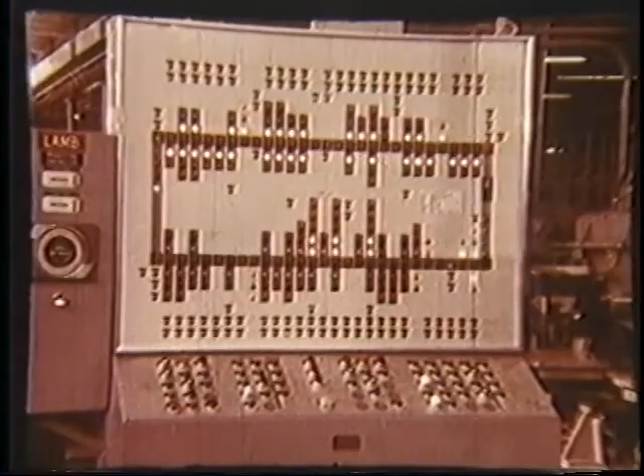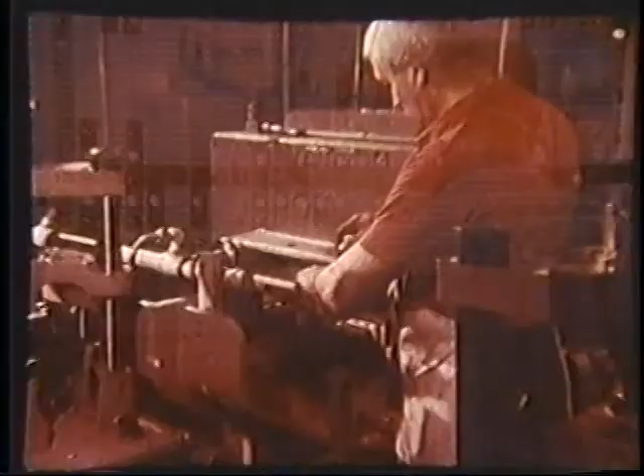A man, a machine, a method, and sometimes a malfunction. Does this ring a bell? Let's face it, this breakdown could have been avoided, and valuable production continued uninterrupted. The fault did not lie with the machine or the twist drill. This drill was damaged because it was improperly repointed.

The twist drill will stand more strain in proportion to its size and weight than any other cutting tool. What makes this tool so durable? It was designed that way.

Get a haircut, hippie! Yeah, this isn't the 60s, dill hole.

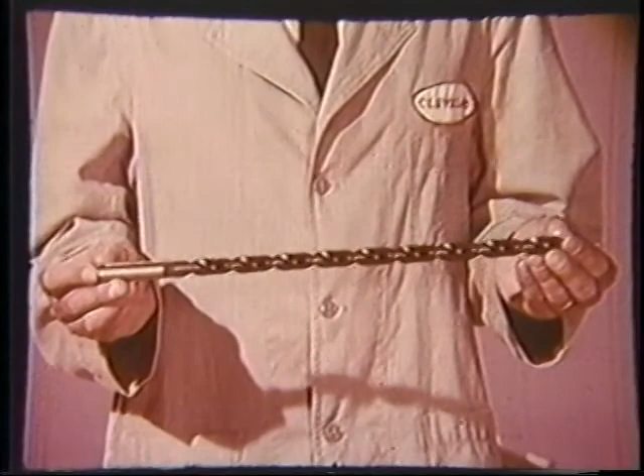Steel to packaging is very carefully controlled to ensure uniform quality and dependability. We'll see this fascinating manufacturing process in a few minutes. But first, let's look at this twist drill as if it were an assembly of parts. Imagine this as a section of metal rod. Although drills are manufactured in many lengths and sizes, they all possess the same basic features.

We can't tell you because, like, then we'd have to kill you.

In the rotating device, shanks come in many shapes and types, but the three most common are the straight shank, the straight shank tanged, which is used with a split sleeve, and a taper shank.

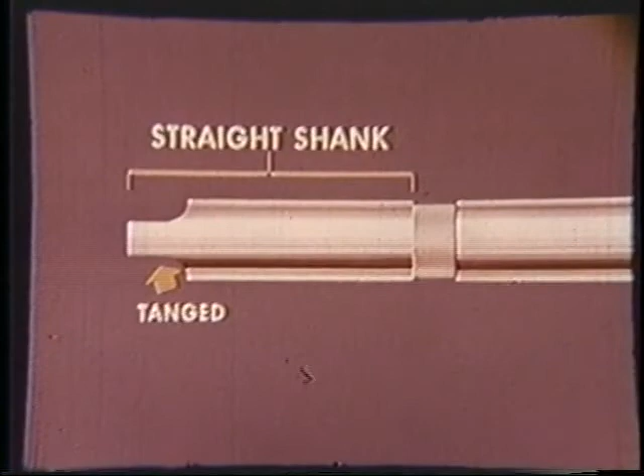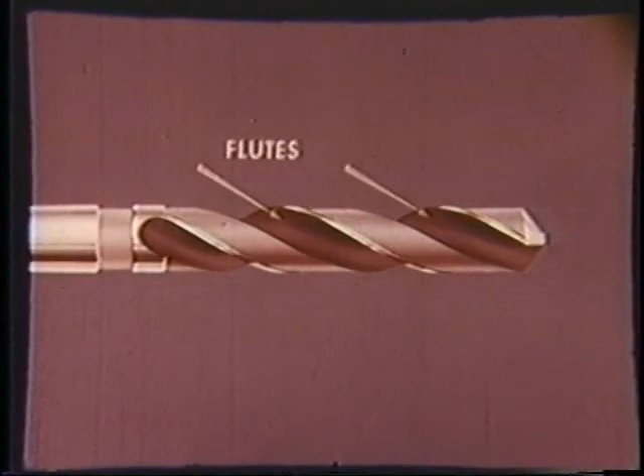The marking recess directly ahead of the shank is the neck of the drill. This is the body of the drill. Formed on the body section are spiral grooves or flutes. The angle of these spiral grooves to the axis of the tool is called the helix angle. The junction of the flutes with the point forms the cutting lips.

The flutes provide a passage for the removal of chips, and at the same time allow coolant to reach the cutting lips.

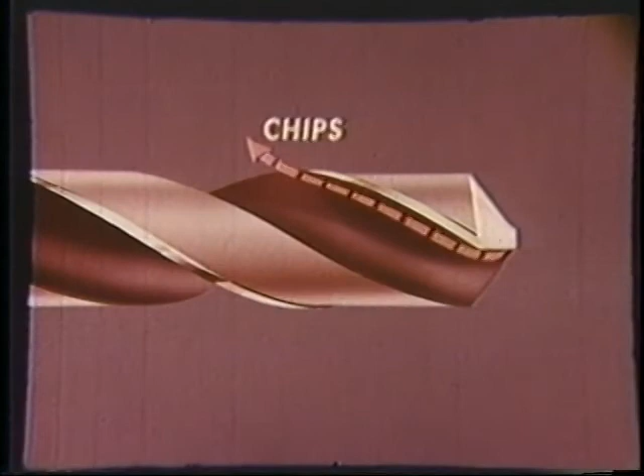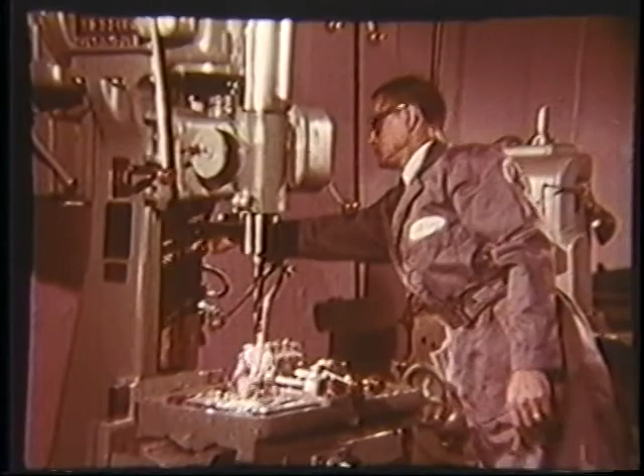That would be a cool doll if you had, like, this little bald dude without a shirt, and you, like, pull a string on the back of his head and he just starts shouting at you.

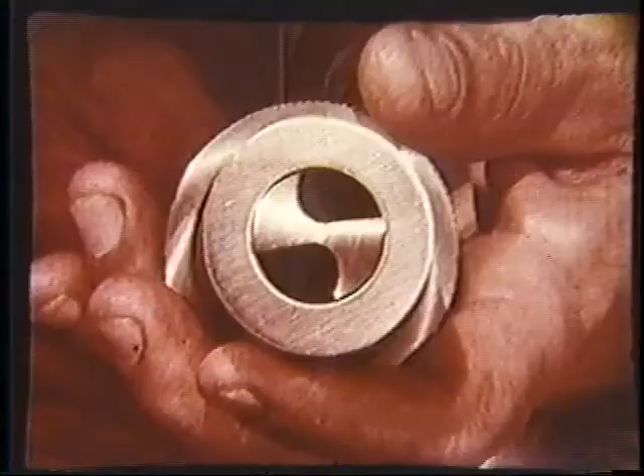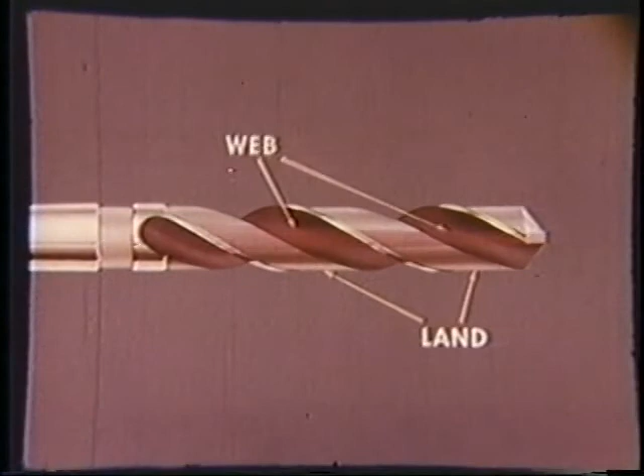The edge of the land is the margin, and behind the margin is the body clearance. The margin supports the drill in the hole by providing a bearing surface. This helps maintain a straight hole. And the body clearance prevents excessive rubbing and heat generation on the walls of the hole and allows an additional passage for coolant. Drills are also ground with a small amount of back taper to keep them from wedging in the hole. The central portion of the body that joins the land is called the web. This is often referred to as the backbone of the drill. The web may be of either a tapered or parallel construction.

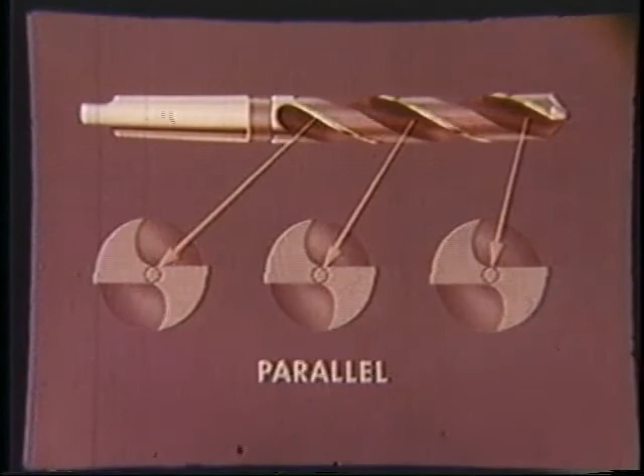The design of the body of the drill will vary according to the type of work performed. And finally, the business end of the twist drill, the cone-shaped surface that does the cutting. We want to go into this point in more detail. It's important. But before we go any further, let's see what goes into making a taper shank twist drill like this one.

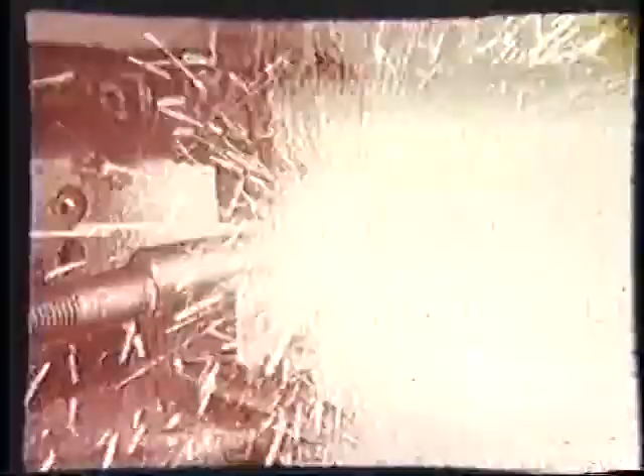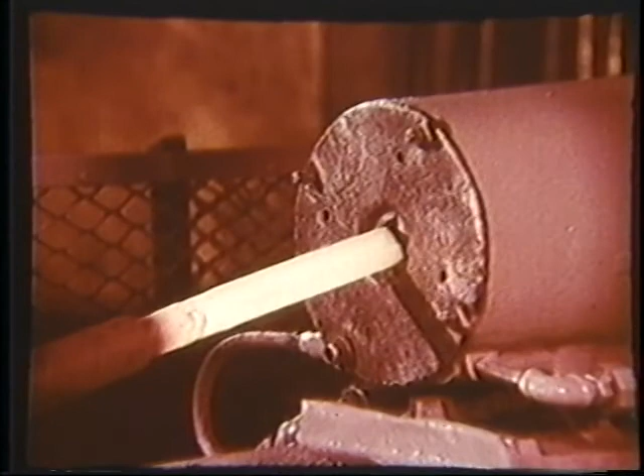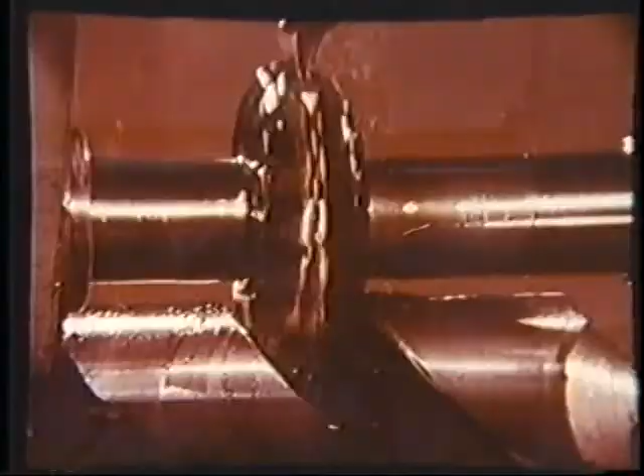High-speed steel for the body section and shank steel for the shank are welded together. And then the high-speed steel end is forged with U-shaped grooves. Then twisted to form rough spiral flutes. Turned, and so is the shank. The flutes are milled to form the lands. And the body clearance is milled to leave the margin. Then the drill is hardened.

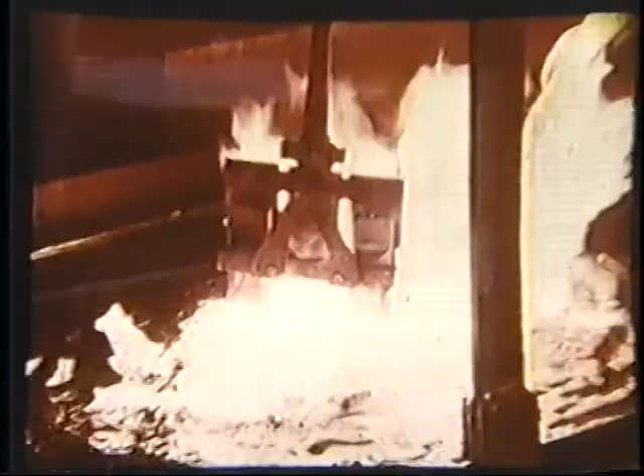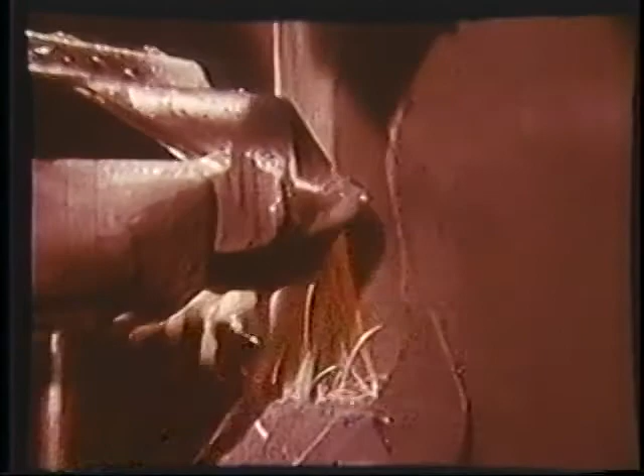And cleaned. Ground. Surface treated. And finally, the point. And the point is the key to successful drilling. Here is the point.

We have a sharp cutting edge, which will shear the material easily out here.

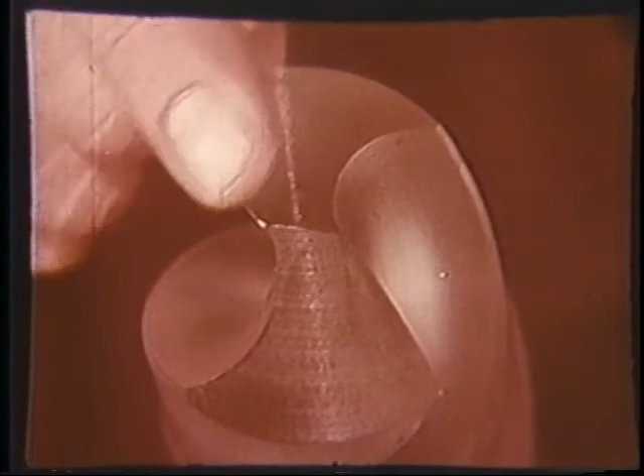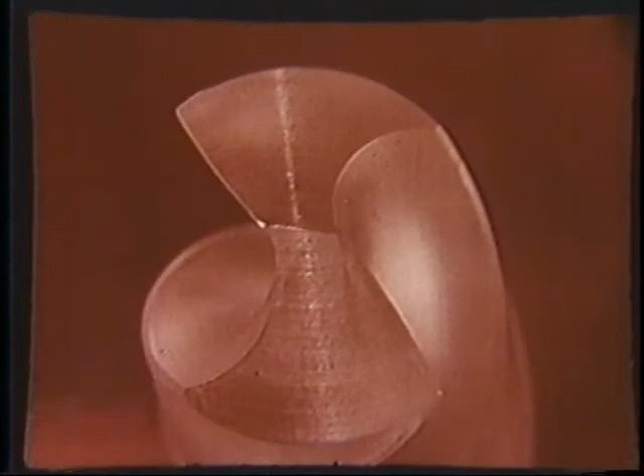This can form a chip. This part of the point is called the chisel edge. It's the edge at the end of the web that connects the cutting lips. The cutting lips are the cutting edges extending from the chisel edge to the outside diameter or periphery of the drill. Now, from another angle, the point looks like this.

When we look at the side of the drill near the point, the chisel edge is here, the cutting lips here, and this portion of the point is called the lip relief. This is the surface of the drill point which slopes away from the cutting lip.

This angle varies with the size of the drill. It should be about 20 degrees for a 1/16 inch diameter drill, and decrease as the drill size increases to about 8 degrees for a 2-inch diameter drill.

The sole purpose of this lip relief is to prevent the surface back of the cutting lip from rubbing on the work and impeding penetration. This lip relief is important to the life of the drill, but this can be shown better in an actual operation.

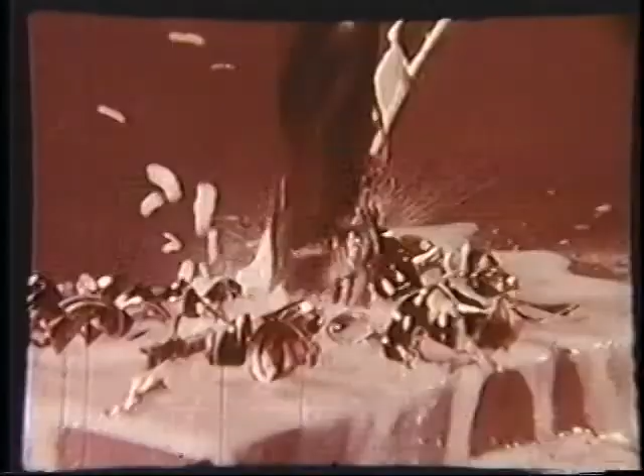This drill has too much lip relief. The life of that point has been shortened considerably. Any point will be ruined if there is too much lip relief and the slope angle is too steep.

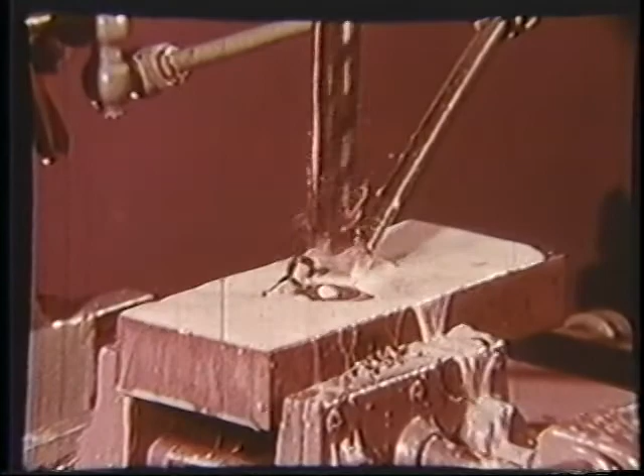When the lip relief is ground on both cutting lip areas of the drill, an angle is formed between the chisel edge and the cutting lip. This is called the chisel edge angle.

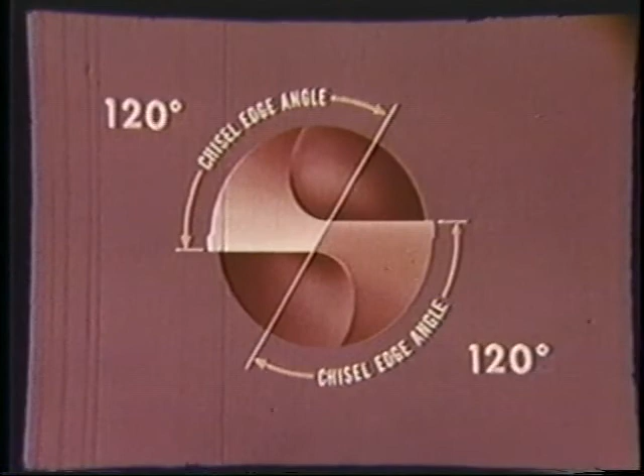This angle usually approximates 120 degrees for drills pointed with lower lip relief angles, and up to 135 degrees for those drills pointed with higher relief angles.

A 118-degree angle point, or a 59-degree angle on the side.

A correct point must have both cutting lips ground at the same angle. Not like this, or you'll produce an oversized hole.

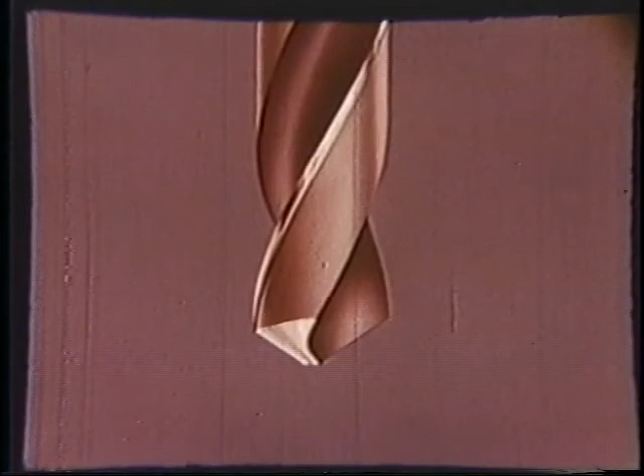A while ago, we mentioned a balanced point. This means the angles on each cutting lip must not only be the same, but each cutting lip must be of equal length, or again, an oversized hole. Remember, either one of these factors, or a combination, will produce an oversized hole.

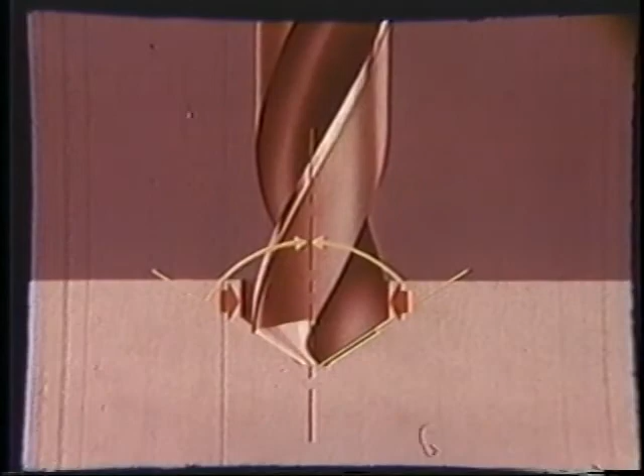Now, this brings us to other considerations. Does the material influence the choice of drill?

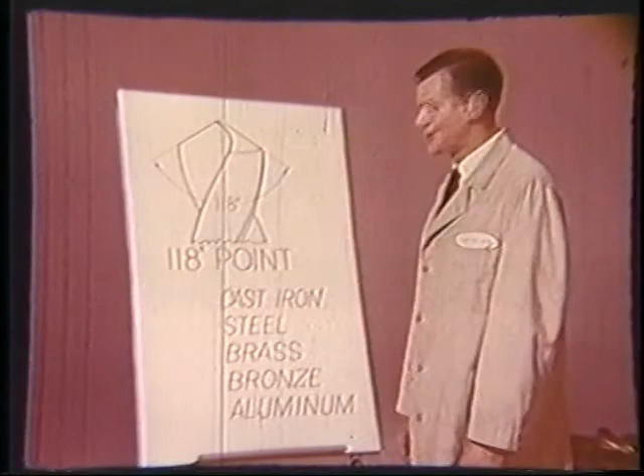This 118-degree point is fine for general-purpose materials such as cast iron, steel, brass, bronze, and aluminum. But with the low tensile strength materials, such as bakelite, wood, rubber, and plastic...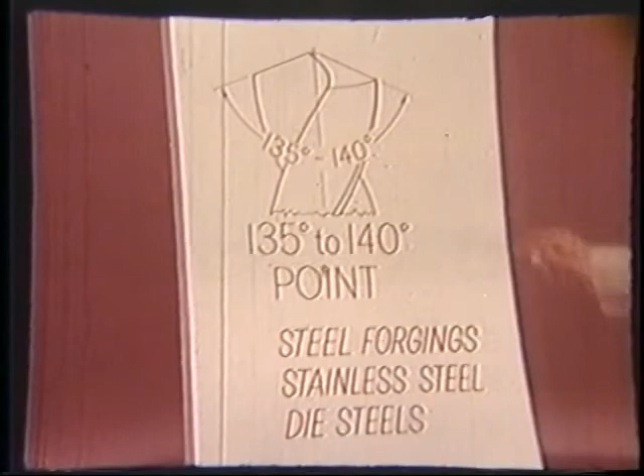A 90-degree long point is best for drilling. While with the harder materials, such as steel forgings, stainless steel, and die steel, they should really be drilled with a 135 to 140-degree point.

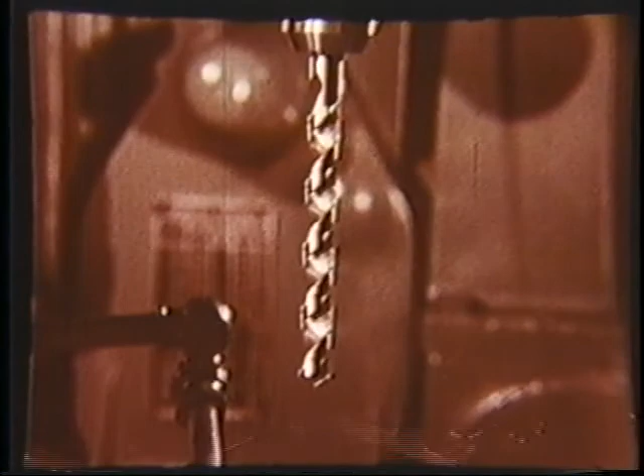This is a high helix drill. The high helix drill is used with materials such as aluminum and die cast. Because of the consistency of the material, in this case aluminum, the chips must escape faster than with other materials.

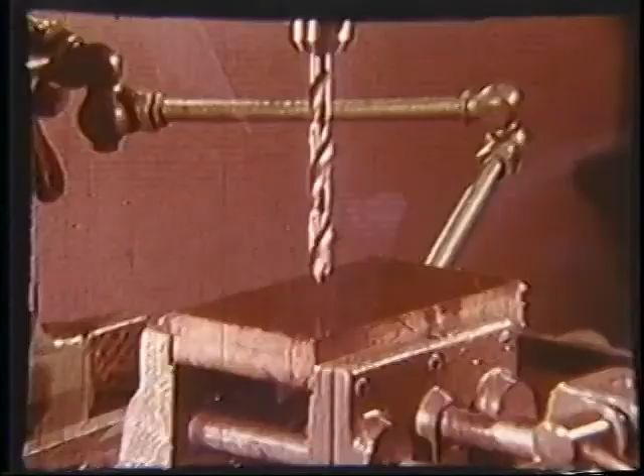It's best used with low tensile materials, bakelite, wood, and rubber.

The harder materials, die steels, forgings, and some stainless, really should be drilled with a heavy-duty drill and a 135 to 140 degree point.

These are just a few of the special duty drills. There are many more. But when you use a general purpose drill, know these angles.

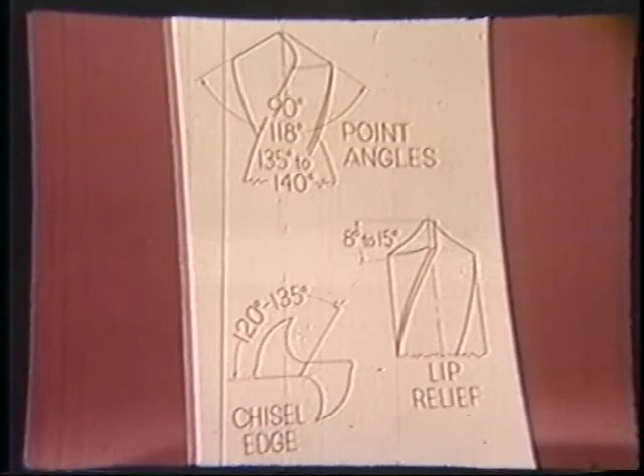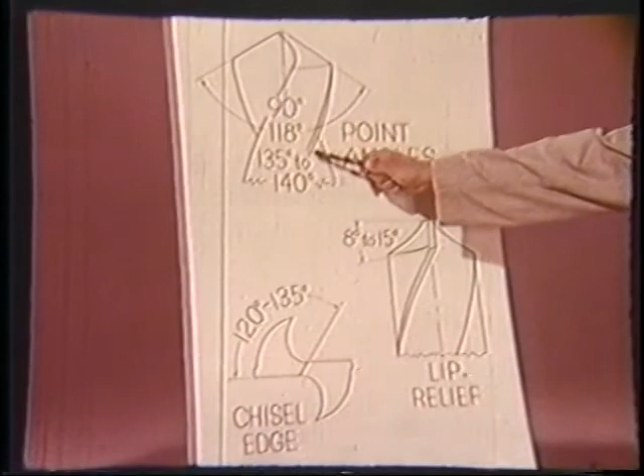8 to 15 degrees lip relief. 120 to 135 degree chisel edge angle. 90 degree, 118 degree, and 135 to 140 degree point angles.

Now let's watch some of that heavy-duty drilling which takes place at the chisel edge of the drill. One of the best ways to illustrate what the chisel edge does is to let the chisel edge only do all the drilling.

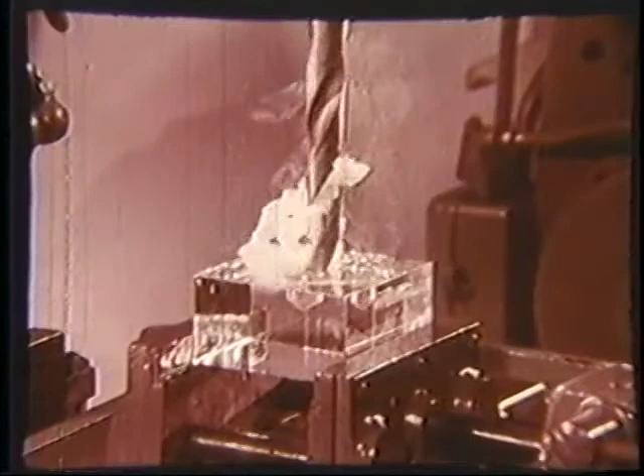See what happens? The chisel scrapes its way through the material. To make an efficient cutting tool, we very precisely combine the chisel edge with the cutting lips and produce a tool strong enough to push the material away from dead center of the hole out to the cutting lip area, where the chips can then be made.

The twist drill is a hard-working cutting tool, and it will continue to perform quite well unless we disturb the delicate balance of the shearing and thrusting forces that occur at this point.

That brings us to other basic facts which must be considered every time a drill is used. Among the most important are the speed at which a drill is run and how it's feeding.

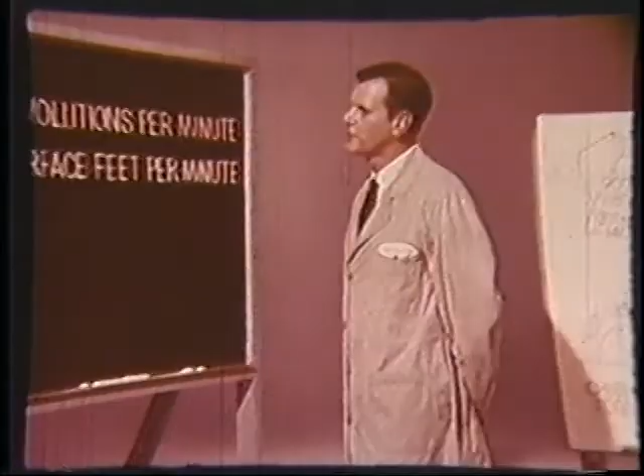This is expressed in two ways. First, by RPM, revolutions per minute, or simply how many times an object rotates in a minute.

Or surface feet per minute: how fast the outside diameter of the tool moves in relation to the work.

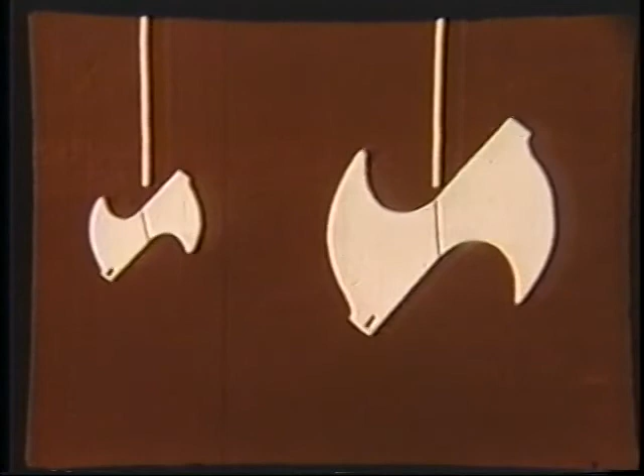Here's a demonstration that will help you understand surface feet per minute. Here are end views of two twist drills of different diameters, one about twice as large as the other. They are traveling at the same RPM. However, since this drill is twice as big, it travels twice as far as the smaller drill in one revolution. This distance traveled is called surface feet.

Now, to make this small drill travel the same surface distance as the large drill, we must increase its revolutions per minute.

Both drills are now traveling at the same surface feet per minute, SFM. SFM is usually used to express the speed at which a given material is machined, because surface feet is common to all diameters, while, as we've demonstrated, the RPM necessary to obtain the given surface speed will vary with the diameter. Each material has a surface feet per minute at which it can best be drilled.

Speed is important, and so is feed. Feed is how deeply the...

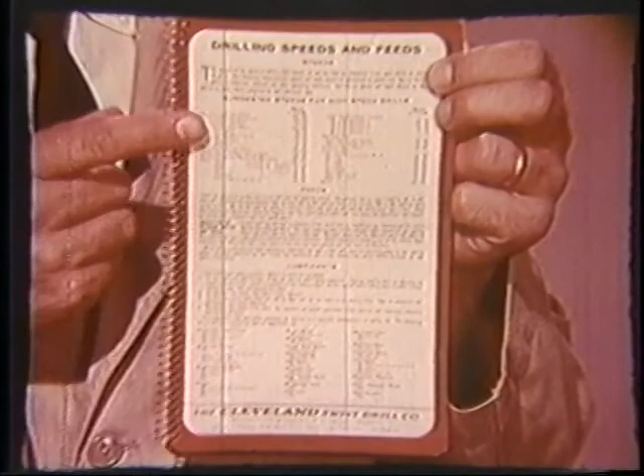Speed and feed charts are available and offer the correct range for drilling. Refer to them. And something else to keep in mind: many drills are ruined every day by excessive speed, which actually burns off the cutting lip corners.

Wherever possible, use a coolant for drilling. A coolant will cool the drill, of course, but more important, well, watch. A coolant should have sufficient lubricity, or slipperiness, to allow the hot chip to slide easily away from the cutting edge and then carry the heat away with it.

While we're here, let's discuss good shop practices. To begin with, to get a good drilling performance, the operator must give a good performance.

Cleanliness is the word. Check that the shank and holder are clean. Dirt will cause the drill to run out.

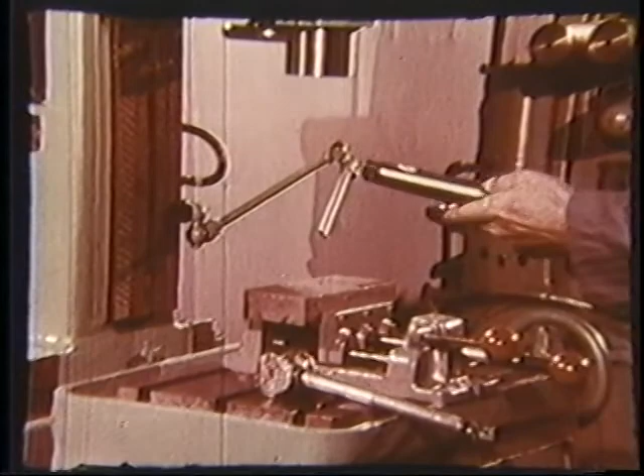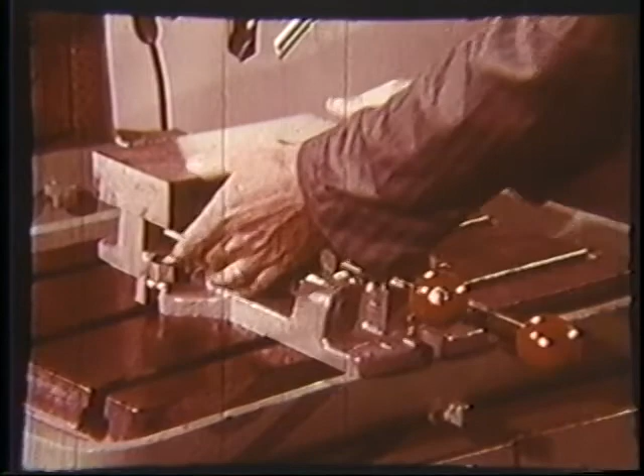Bad clamping allows the work to spring and can be dangerous. In clamping, make certain that it's rigid.

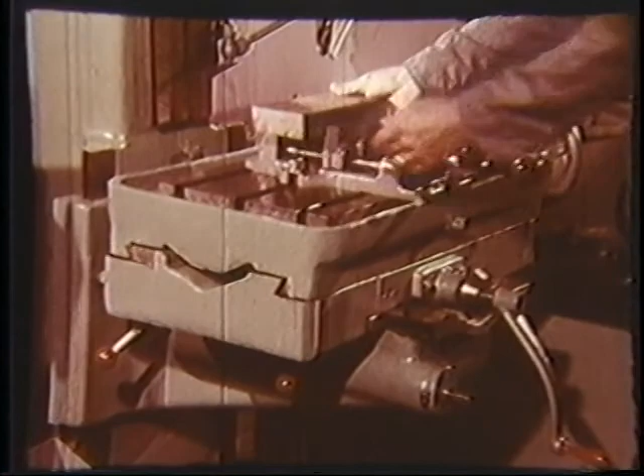And if bushings are not used, spot the hole before starting the drill into the work.

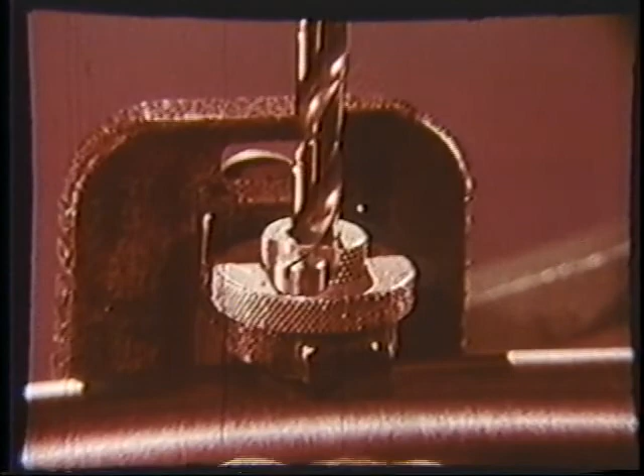And of course, when bushings are used, be sure they are properly aligned and of the proper size.

Then check those all-important feeds and speeds and the type of coolant to be used. You're ready to start. Almost.

Here's something that should be almost second nature: safety. Wear your safety glasses at all times. And think, don't relax. Stay alert.

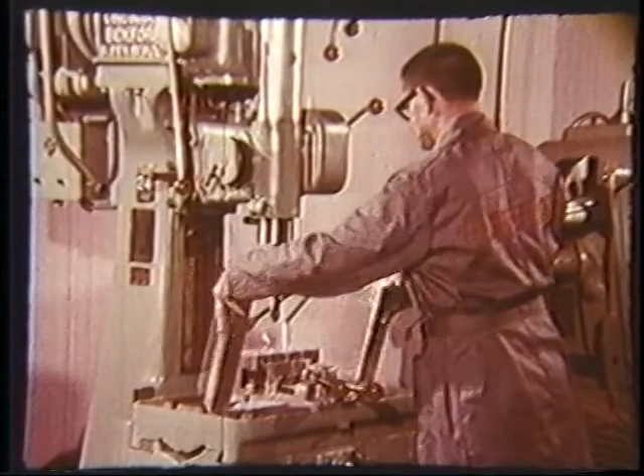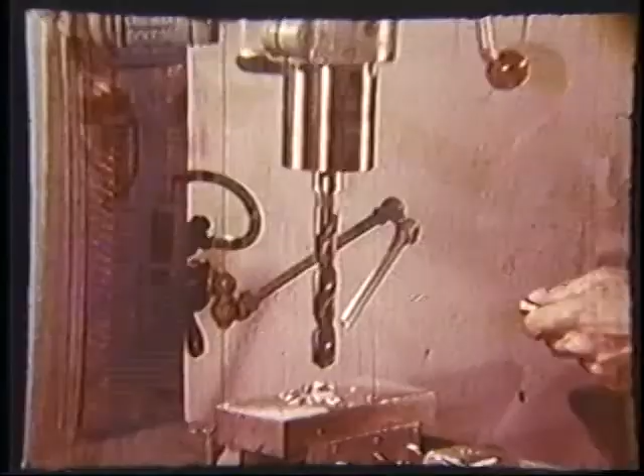Remove the drill with a drift. A file just wasn't meant to be used for this operation.

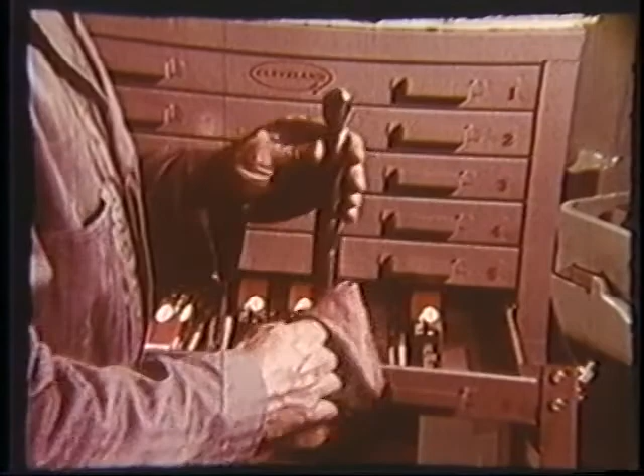Handle the drill carefully. Check to see that it hasn't been damaged. Then, after use, store it properly.

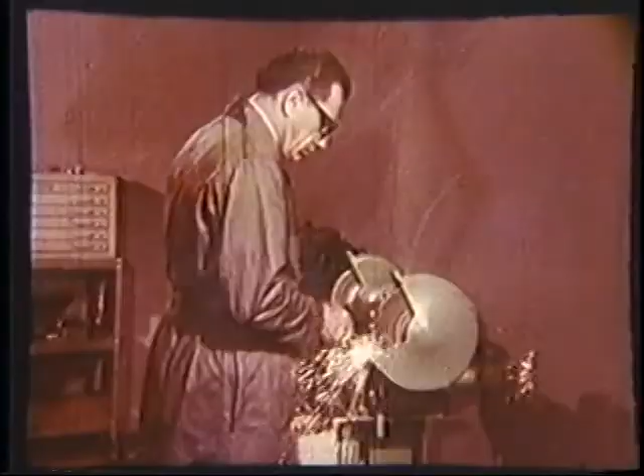When it does become necessary to recondition a drill, there are certain things to keep in mind. While there are experienced tool grinders who can repoint a twist drill quite accurately by hand, most of us lack the experience necessary to produce a consistently acceptable drill point by this method. In this case, the drill has been deeply damaged by grinding heat and subsequent quenching in water.

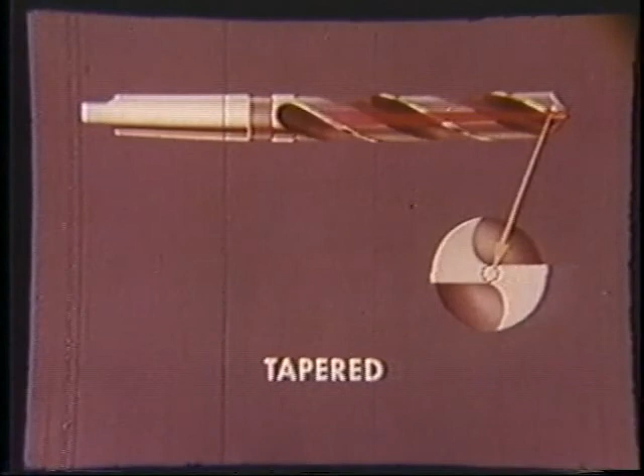Wherever possible, the drill should be repointed by machine. As a drill is used and repointed, it gets shorter, and the web increases in thickness as it approaches the shank. So the web thickness must be reduced for efficient drilling. Usually, this is not true of most parallel web drills.

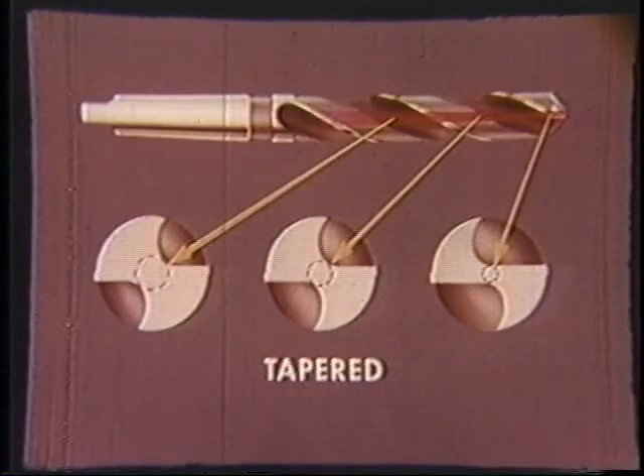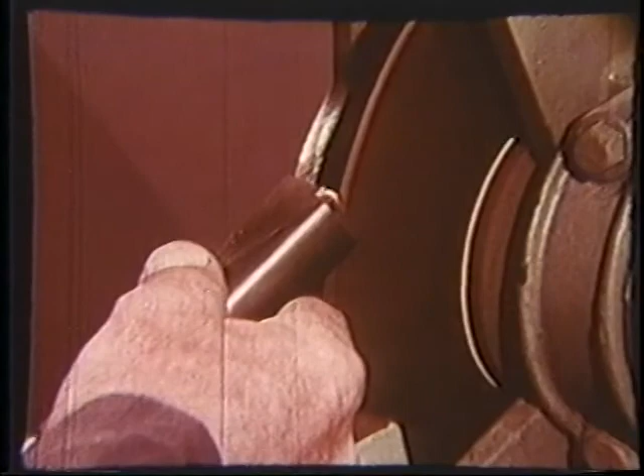Web thinning may be accomplished in several ways. Webs may be thinned on the corner of the grinding wheel, periphery of the grinding wheel, and side and corner of the grinding wheel. Whichever method is used, be sure to remove the same amount of metal from each side to ensure proper cutting action.

To avoid excessive thinning of the web, which may cause the drill to chip out or fracture prematurely, another method of web thinning is to undercut the lips. This is used principally for drilling steel forgings.

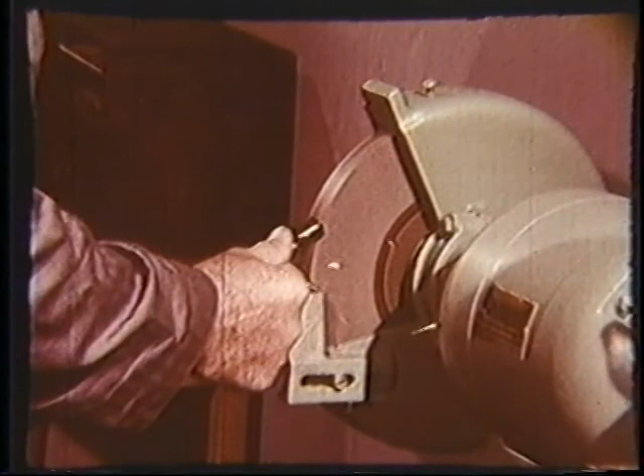The point of a crankshaft drill is almost always notched. An offset or split point is good for hand operation. The web is heavy and notching decreases the feed pressure required for drilling.

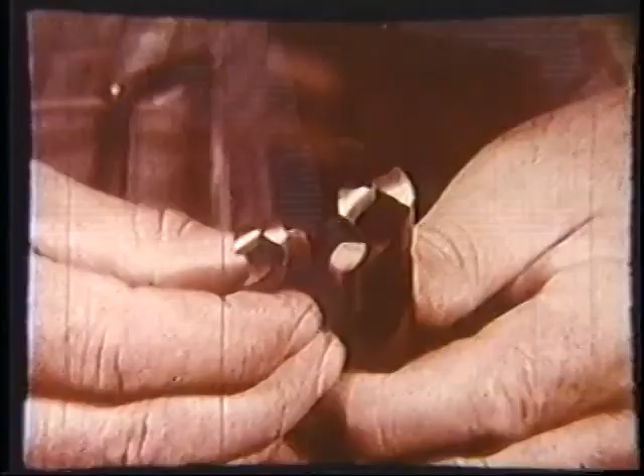Offset points are used on other styles of drills where the end pressure must be reduced. Offset points also reduce or eliminate drill walking in portable applications.

This is a regular drill point with the corners ground off. It's used for drilling cast iron and is commonly referred to as a double angle point.

The regular drill point sometimes digs into the work when drilling soft materials. This can be overcome by grinding a flat surface along each cutting edge. This is done on the side of the grinding wheel.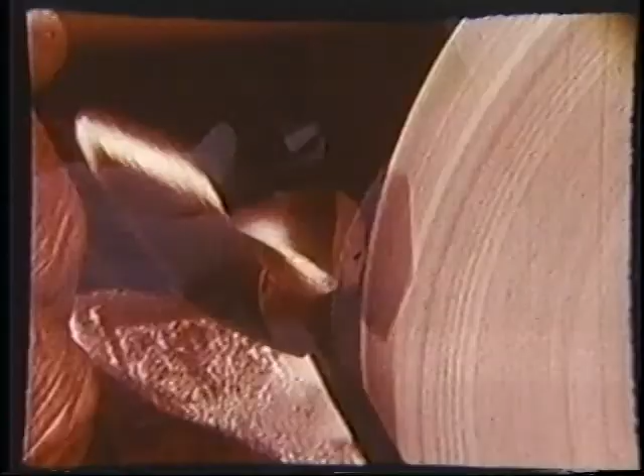There's a point for every application. We've discussed a few of them. Here are the basic drill points, and they each produce their own type of chip.

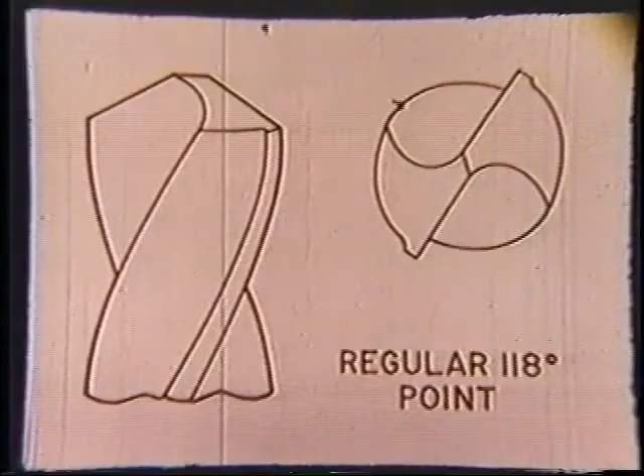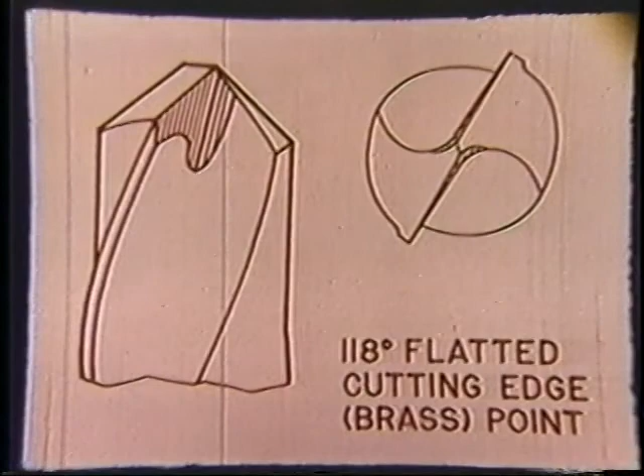The notched 140 degree. Undercut thinning. The flatted cutting edges. The split or crankshaft point. And the shop-thinned regular point.

The designs of the body vary according to the work to be performed.

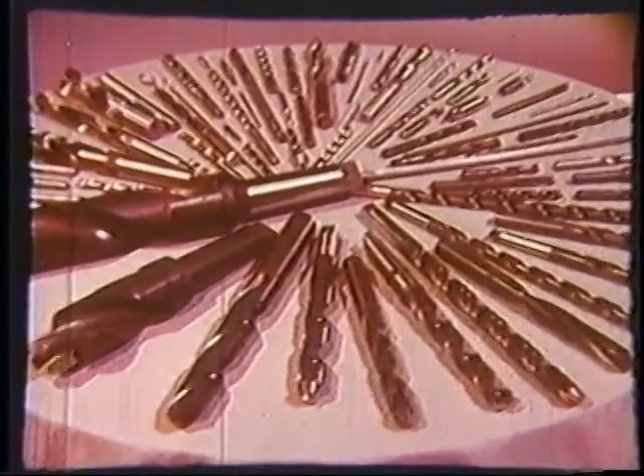And chip breakers, coolant feeding drills, and screw machine drills. There are special drills, step drills and subland drills, which cut more than one diameter.

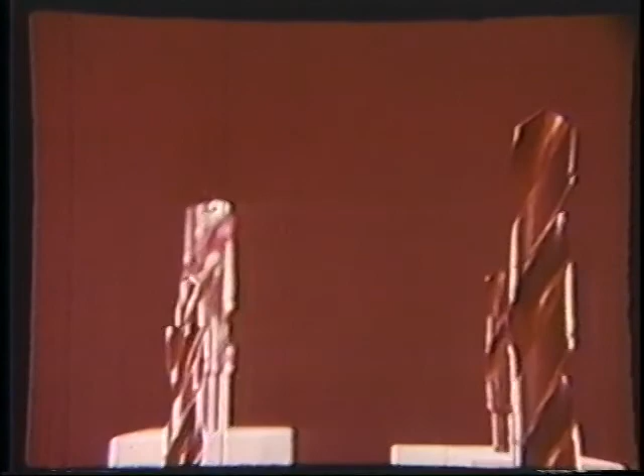Combination drills, which perform more than one operation. Gun drills. Twin jet drills. Straight flute drills and half-round drills. There are solid carbide drills, carbide tipped ones, and cobalt drills designed for space-age materials.

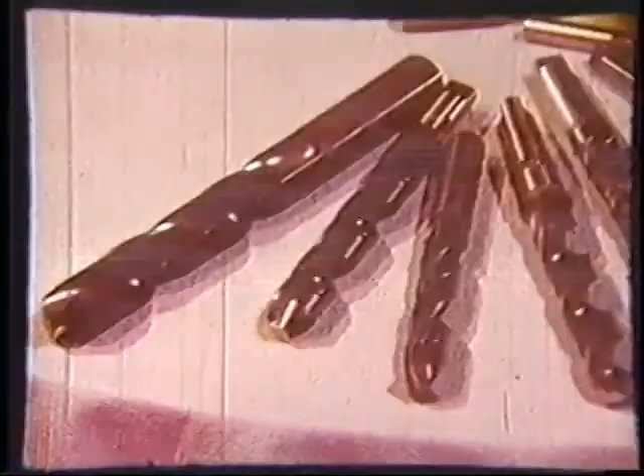Drills are used on aircraft and automobiles, bridges and boilers, for tractors and toys. They can be used as one or as many. In fact, just about any way they're needed.

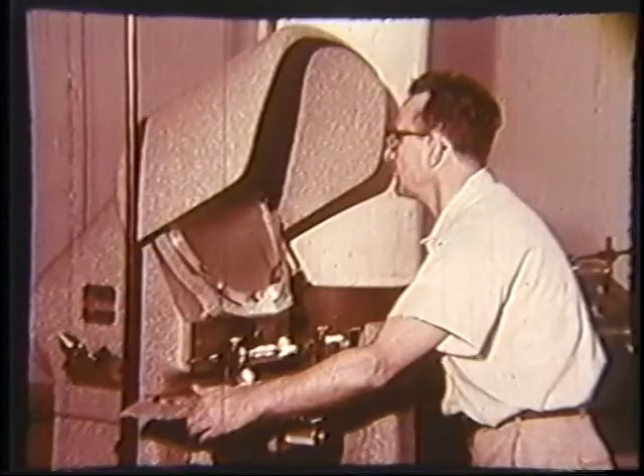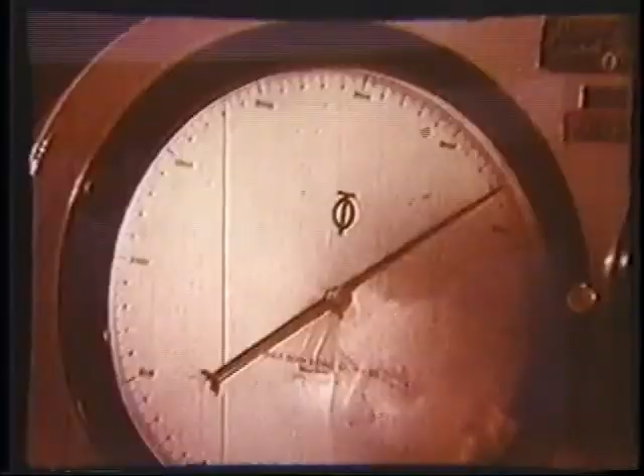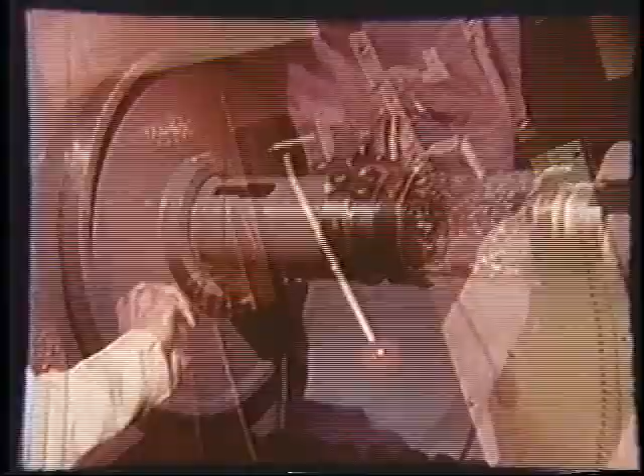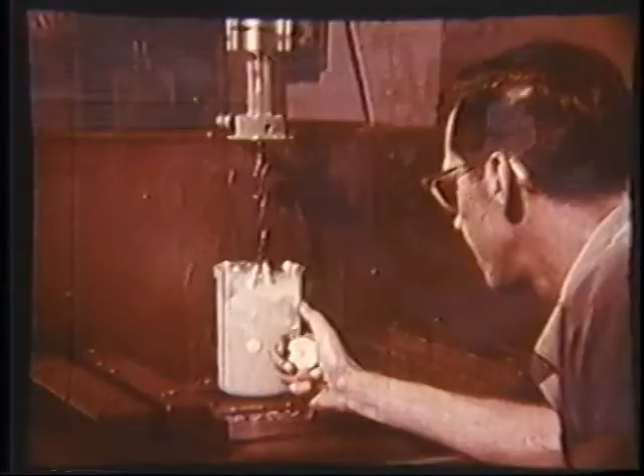Drills have become a vital cog in our system of mass production. Their value has been proved many times. Twist drills, as we know them today, didn't just happen. They were a result of a continuous search for better quality in raw material, drill design, and manufacturing methods. The twist drill industry, through aggressive research and development programs, will continue the quest for new and better products.